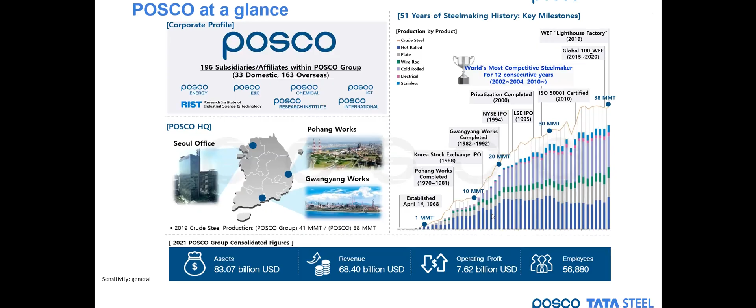On the right, you can see we have been the world's most competitive steelmaker for 12 consecutive years since 2010. Our revenue is somewhere around $68 billion. So just a short glimpse of where we come from. And then to my next slide. This slide was not shared in the Hyperloop conference before. The rest are mainly from the Hyperloop conference presentation. But this is how our interest in Hyperloop started.

There was a paper back in 2009, I think from a university in Austria, that had this concept of a vacuum tube transport, targeted more on passengers. When we found that paper and read it, we thought it was very interesting. So we launched a feasibility study in 2010, which lasted for 2 years. Many of you already know that it was 2012 or 13 that Elon Musk came up with the word Hyperloop, but our interest started before. So we looked at how this could be feasible: a tube in a vacuum, which would reduce the resistance for the trains.

We also looked into several lines where we could actually construct this type of Hyperloop within Korea. The result came to a conclusion that unless the technology had a switching technology along with it, it would not be economically feasible. So what came out from our concept was a low speed, semi-vacuum tube, autonomous, with a freight size according to the pallets, and different kinds of details within the structures. The reason we came to a very low speed was the loading and unloading issues: it would be meaningless to send it 1,000 kilometers and then have it wait an hour or two at the end to load and unload. So this is where we started. After our 2 years of feasibility study, we stacked it and waited until the technology came out that we thought could be more commercialized.

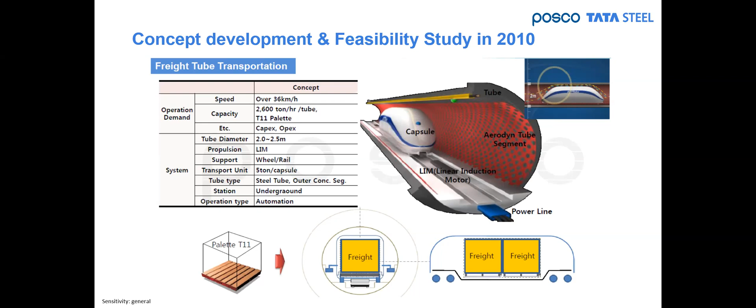Then what happened was that in, I think, 2019, we saw a Hyperloop company in Europe, of course, Hardt. They launched their 30-meter test tube, which showed they can do the switching technology. Then we got interested and took our previous interest back on the table, and then we approached Tata Steel, because it was in the Netherlands, and asked if they would be interested in working together to assist in the Hyperloop development.

So Tata Steel and Posco have agreed, and then we approached Hardt and started to have this joint collaboration to support the Hyperloop industry. Now, I do have a civil engineering background, but when you talk to an engineer, engineers usually talk from the structural side. So we talk about stiffness.

But when you come from the material side, such as steel makers, we come from the material language, which is mostly strength. So although we talk the same language, there is a different meaning or a different approach of where we come from. So what we did was we talked to the Hardt engineers and asked them, what are the actual items or features that you are looking for from the steel side?

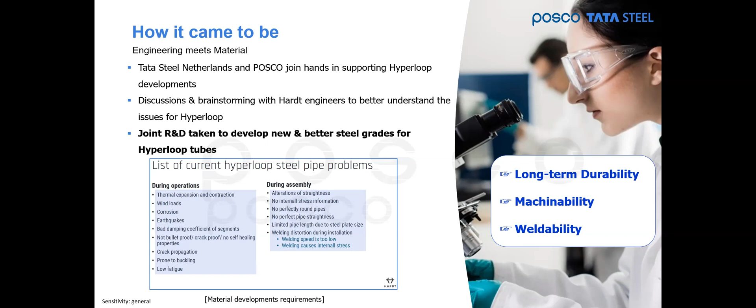From those 3 topics, if we come back to the steel side, damping property was chosen, then yield ratio for easier machinability, and improving CEQs for the weldability. So considering the different chemical compositions, heat treatments, or microstructures, a new steel grade was developed with improved damping performance, lower yield ratio, and similar weldability.

If we go into the details a little bit more, improving safety was an issue from two sides. One was damping. Compared to the regular S355s, the new steel grade has about 1.6 to 2 times better damping ratio. Along with that, we wanted to add low temperature toughness, which is about 4.7 times compared to the regular S355s.

Meaning, if you look into what happens in the Hyperloop tubes, you see a lot of vibrations, and that will lead to fatigue, so better damping will actually help with safety. And Hyperloop, wherever it is around the world, will go to regions with very low temperatures. So that also will improve safety.

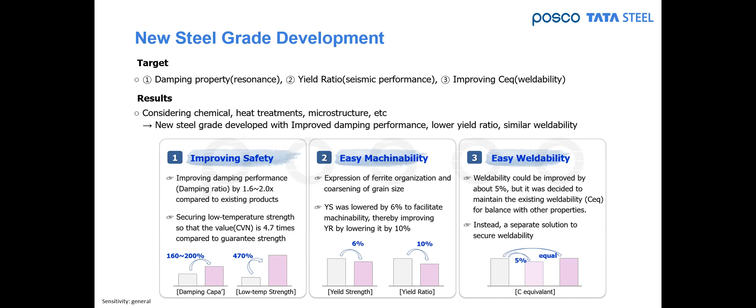And therefore, the first steel grade just for Hyperloop was developed and implemented. Now, when we do these kinds of developments, we do not do it by ourselves. We know that just developing the steel grade and leaving it to the market to use does not really work.

And I think my colleague here wanted me to share the actual sample, if you can see it. That's the actual sample of the steel grade. It was manufactured according to the actual thicknesses. The actual material has been produced and also made into pipes and is now being assembled with the other supports and the tracks currently at a facility in the Netherlands.

So let me give you a glimpse of what this kind of new steel development actually means. It means, investment-wise, several million dollars, because we would have to do it in our small labs, then go into pilot plant productions, and then go into our first real facility to do the actual manufacturing. At a steel mill we cannot produce 1 ton. When we're doing the actual production on our facility, it goes into hundreds of tons.

Our R&D was based on the current processes that are being used. Meaning our weldability: of course, everyone wants to do it twice as fast, but for welding with the current process, it is not possible. Usually what happens when you need that, you put two lines. So with spiral welding or other welding, when you make the pipes, either you do it with two different lines or two different ways of doing the welding from both sides. So that is not the case.

For us, if you do a simple welding with the same process, it will be about 5% faster. But then the issue is, it's not on our steel. It will be on the other material that's being welded to the steel pipe, and you have to follow that criteria. So unless we change everything into a new material, we just left it that it will be the same as it is currently right now.

Is it the hybrid welding technique or is it laser or gas welding? What's the type of welding? No, it's the same sub-arc welding process that is being used in the pipe manufacturing.

Okay, we've got more questions. Let's go through those. Which industries do require similar properties of the steel like Hyperloop does? So where do you see maybe benefits for other industries with the steel you have developed right now? Well, for this steel grade, we have only targeted Hyperloop.

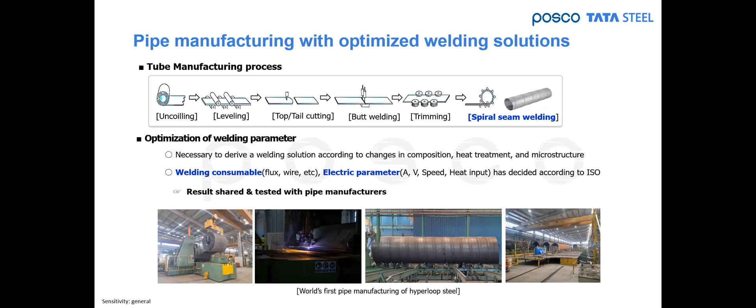On that point, if we talk about damping and the resonance issue, the approach is not only from the material side. It also has to come with the shape. We believe that issue should be addressed later on with the actual shape of the pipe. That's why we're sharing the structural development that is necessary. But if we can give a material that is better, it would improve even further on the structural side. There are different methods to countermeasure it. We'll see what the actual requirements are when we have the high-speed tests.

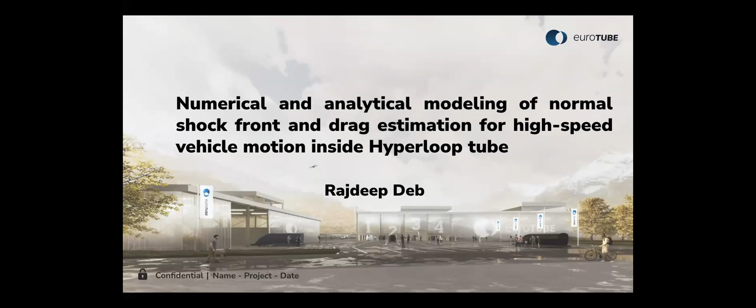So my talk is about numerical and analytical estimation of the shock front developed in front of the vehicle, and to what extent we can use simple numerical and analytical tools to understand the behavior of the shock and also predict something about the drag estimation of the vehicle. So basically, my talk is about this viewpoint.

In Eurotube Foundation, we are working on aerodynamic studies regarding vehicle movement inside such a closed tube system, and we developed some simple tools to understand it. One is a one-dimensional piston problem, where analytical modeling can be used to understand this flow feature behavior, and we also have numerical solutions. Then there is an analytical solution development on choking flow condition for finite blockage ratio. Finally, there is some comparison with a 2D CFD solution.

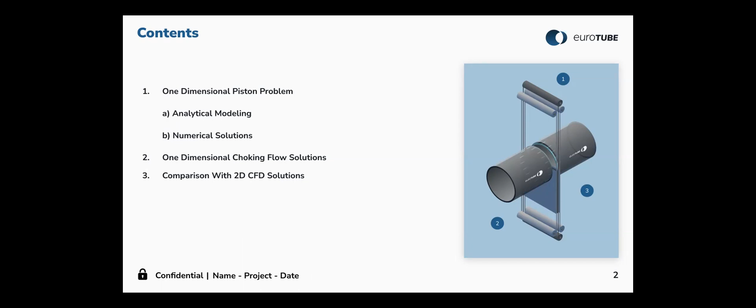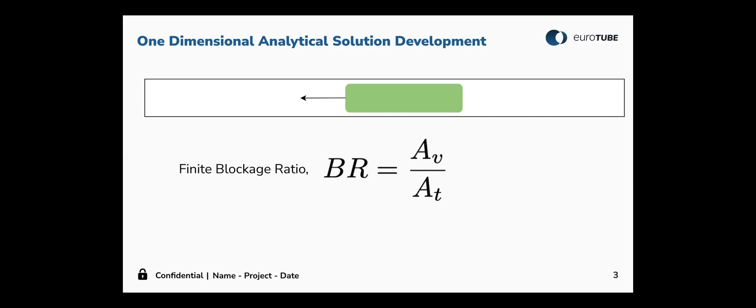Basically, if you look into the problem of a vehicle moving inside a Hyperloop tube, it's a closed tube system, and that's the criticality in this particular problem. There is a finite blockage ratio, and typically a vehicle here I have made a very simple approximation: the vehicle is like a piston shape moving inside the tube. For a simple calculation, if you look into the problem with 100% blockage ratio, the idea is can you get an understanding of what kind of flow features develop from this estimate, and what is the maximum drag with this 100% blockage ratio.

One famous problem in this regard is the piston problem. Whenever a piston moves inside a closed tube system at a very fast speed, some kind of shock front develops, and this shock propagates faster than the piston speed. This shock also carries a high pressure in front of the piston, and as the piston moves away, a low pressure develops behind it. Here you can see the pressure in the tube, with a high pressure developed - this high pressure shock front moves ahead of the piston. Now the question is, what can we understand about the shock strength, meaning the pressure ratio, and what will be the shock speed from this solution?

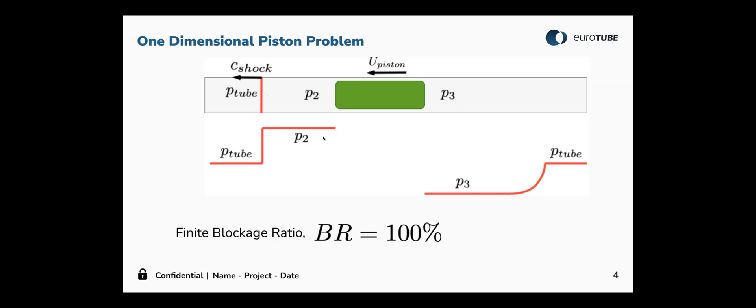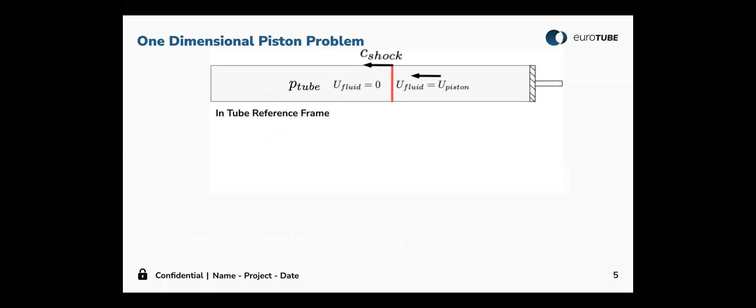For that, we need to look at the problem from the point of view of this normal shock front. Typically in the tube, if you look at the problem from the tube reference frame, the shock is moving ahead of the piston. But this kind of problem can better be understood by looking from a different frame. First of all, from the tube reference frame, this shock front is developing - ahead of it there is the pressure of the tube, and behind it there is the pressure in front of the vehicle.

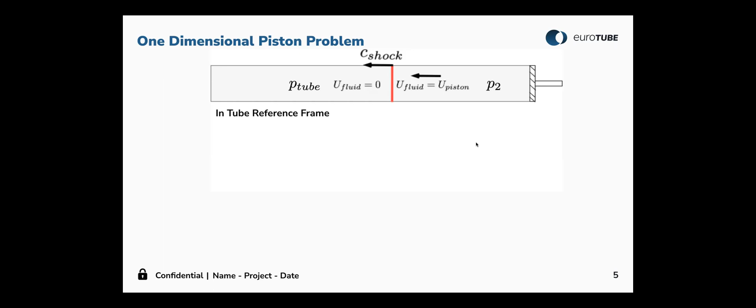Now, if you look at the problem from the point of view of the shock reference frame, you can develop an understanding of shock speed. When we look at the problem from the shock stationary frame, the upstream condition - the fluid or tube we are going into - gets the shock speed, and behind it, the shock speed minus piston speed is developed. There is a famous solution for that, where we can understand the ratio of upstream to downstream fluid speed and pressure ratio based on this pressure ratio. This kind of solution can be established just by solving mass, momentum, and energy conservation equations along this domain. In addition, there is also the relative speed between the upstream and downstream side, which is basically nothing but the piston speed, that can also be established.

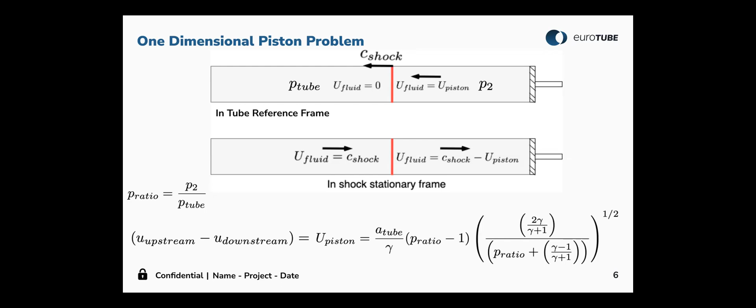Using these two equations, we can finally find out what will be the pressure ratio, because piston speed in our case is the vehicle speed. From that, we can understand what is the pressure ratio, and also the temperature ratio and other quantities can be established. Also in the tail end of the vehicle, because the piston is moving at some speed, there is an expansion wave that develops.

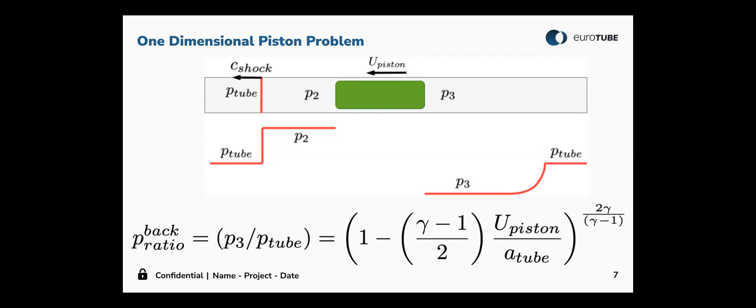This expansion wave saturates into the tube pressure at a finite distance, but it can also be established just by solving the mass, momentum, and energy conservation equations what is the back pressure. So a maximum back pressure and maximum front pressure can be established. From there, we can understand what is the drag calculation, and here is the solution. Basically, we can know the pressure solution, typically pressure ratio from there, and given the tube pressure, you can know the pressure solution.

There is also a pressure jump that develops. With the pressure jump, there is also high temperature developing in the front, and there is also low temperature developing in the tail. I will talk about that later. From that, we can calculate the drag and the drag coefficients also, and this gives us a maximum estimate of pressure induced or shock induced drag on the vehicle, and as well drag coefficients.

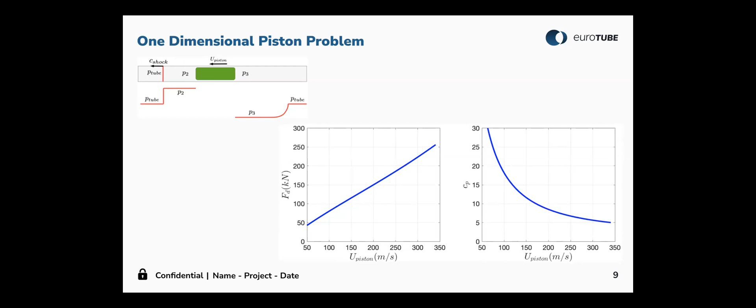Now, this allows us—because this shock is propagating in front of the vehicle, one important feature we didn't consider here is the friction effect. All the friction is attenuating, but if we just try to understand what will be the fate of this shock as it is moving ahead of the vehicle, and if there is any blocking region in front of the vehicle at a little bit far distance, because the shock is moving much faster than the vehicle, then there will be a reflection of the shock, and the shock is coming back into the system.

So basically, the energy that the vehicle has provided into the fluid medium is actually hitting back the vehicle at some point. Therefore, it is also important to understand what will be this reflection effect, and if there is any reflection, what is the corresponding impact on the drag of the vehicle because of this.

The problem can again be looked into from the tube reference frame. In the tube reference frame, now we know that as it interacts with the tube end wall, there will be a reflection shock developing, and we can look into the problem again from the shock stationary frame, and this time it's a reflection shock stationary frame.

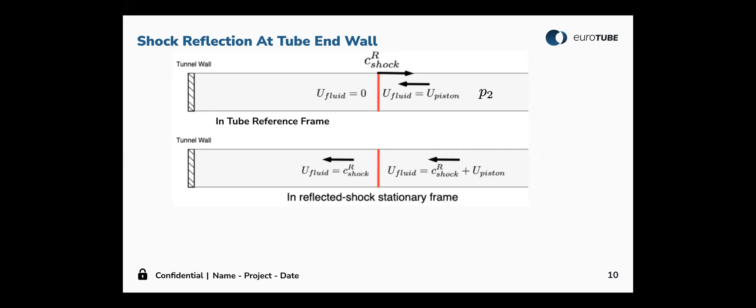We can calculate the corresponding pressure, because now we know the pressure in front of the vehicle, behind this shock, from what we calculated previously from the incident shock wave. Now from the reflection shock wave, we can know what is the corresponding tube pressure developing in this case. This can be calculated again using the same features of upstream to downstream velocity ratio, and finally we can estimate what is the reflection pressure ratio.

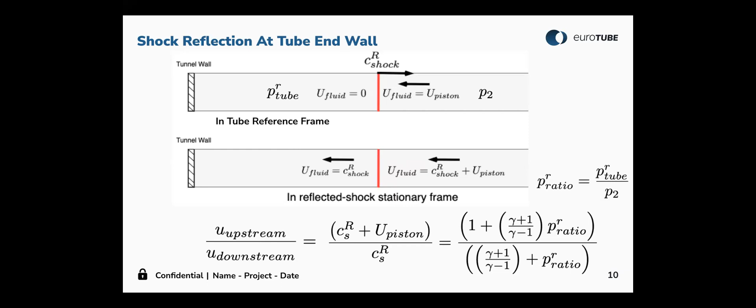This is an important point, because as we look into the problem, for example, if a vehicle is moving ahead from quite a far distance, and this shock attenuation is not enough, then this shock moves ahead of the vehicle, hits the end tunnel, and comes back to hit the vehicle. Here you can see this multiple reflection effect on the vehicle. So the vehicle is moving ahead, the shock moves ahead and then comes back to hit the vehicle.

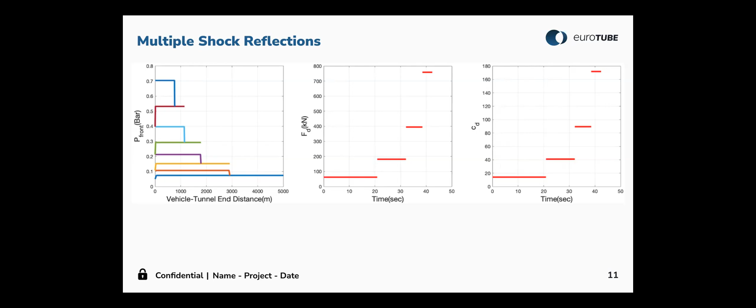At some point, it leads to a jump in the vehicle's drag, and this is therefore a potential thing to be worried about—what is this instantaneous jump in the drag, and what is its corresponding influence on vehicle safety or stability. We can see that there's a continuous drag jump. Of course, this is a much more extreme condition, because we are not taking into account the attenuation of the shock, but it indicates that these kinds of reflection effects are there in the closed tube system. So we need to be careful with shock reflections or shock interactions with the vehicle.

In the previous solutions, we can analytically understand the shock features, but the question is the vehicle will take finite time, because it's not instantaneously getting into this velocity. There is a finite time for the vehicle to reach this speed, which means acceleration. So can acceleration have an effect on the shock speed or shock strength? This kind of feature requires more detailed understanding.

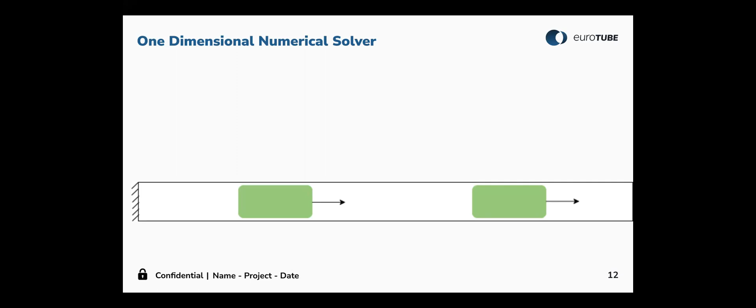Rather than going to very complicated CFD solutions, we can get an estimate from one-dimensional numerical solvers. What this means is that we're averaging the solution over the entire cross-section of the tube, giving us an estimate of the mass, momentum, and energy conservation equations averaged over the cross-section. This kind of problem can be solved numerically.

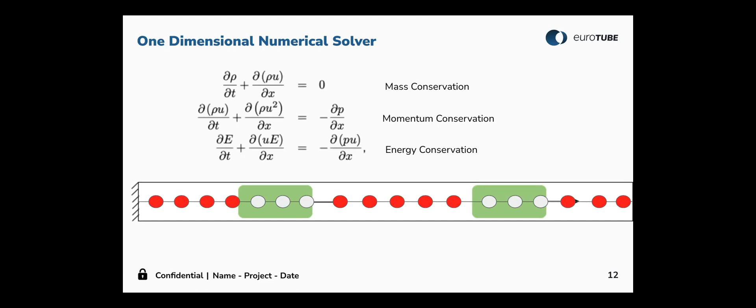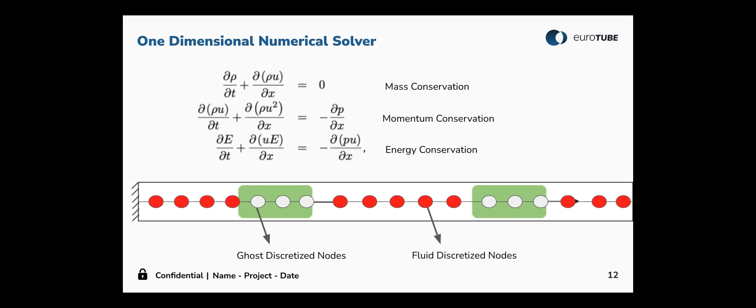I'd like to give a feature of how the numerical methods are developed. The domain can be divided into finite grid nodes, and from there we have certain discretized fluid nodes. Because of the vehicle's presence, there are some nodes which are called ghost nodes. When developing numerical methods for such problems, we need to understand how to track the location of the vehicle, because there are cells corresponding to fluid flow and cells corresponding to the vehicle. This kind of problem can then be converted into a simple numerical solver.

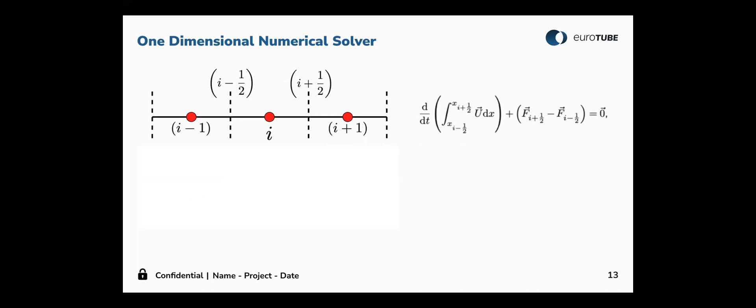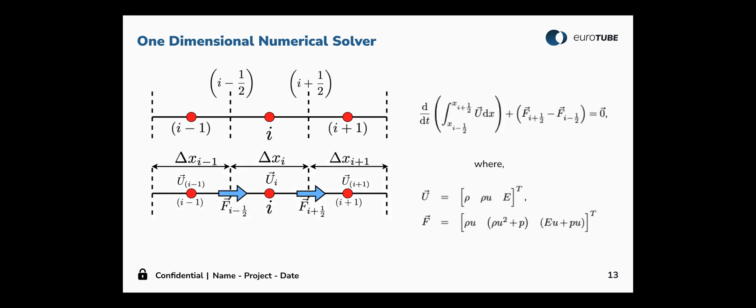There's a famous numerical solver, the finite volume method, which can always be used, and this requires a very critical understanding of how the fluxes can be calculated at the fluid node boundaries. We then need to get a discretized understanding of these fluxes. These solutions can be established in a number of ways.

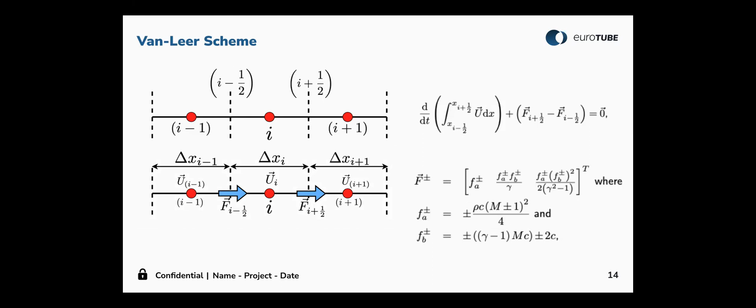This becomes a completely hyperbolic problem, which means the waves are propagating at finite speed, and we need to understand in which direction the waves are propagating. Some famous schemes are available, and one we use here is the Van Leer scheme. Using that, we can understand the direction of wave propagation, and perfectly capture the discontinuities or jumps in the pressure solution along whichever direction they are happening.

The presence of the vehicle makes the problem a bit more complicated, but if we track the vehicle's location correctly in the code, we can understand where to implement the boundary conditions corresponding to the vehicle, and implement them to satisfy certain conditions. In the case of the vehicle wall, we should not have any mass flow rate across the wall. So that condition needs to be implemented in this numerical solution.

This is implemented by considering the wall speed, and introducing a ghost cell inside the vehicle, the first ghost cell, such that the relative speed between the ghost cell and the wall of the vehicle is opposite to the relative speed between the fluid cell, the next fluid cell, and the wall of the vehicle. By that, we can implement this no-mass-flux condition in this particular problem.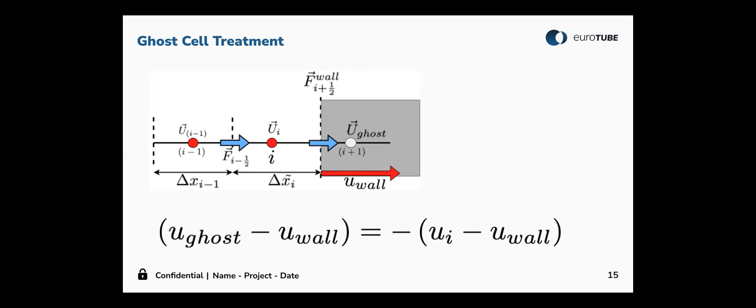In this problem, we are considering an adiabatic condition, meaning the vehicle wall has no heat flow into the system, an ideal condition. We can also go to an isothermal condition where the vehicle has a finite temperature, but in that case we need special boundary conditions for the energy equation.

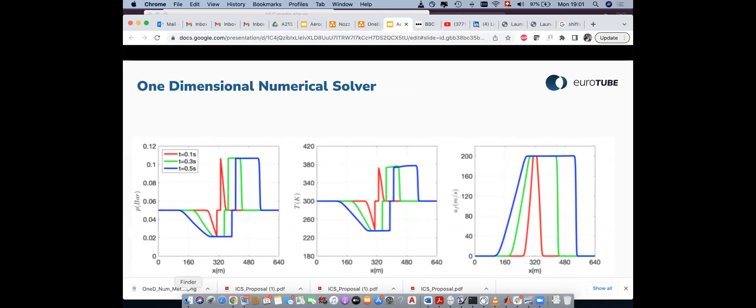With these features, we can solve the problem of the vehicle moving inside the tube. I'd like to quickly show you a video about this, so you understand the power of developing these kinds of numerical solutions.

In this feature, you'll see this step jump representing the vehicle, along with the fluid pressure. As the vehicle moves into the system, a fluid pressure compression wave is generated, and slowly it's converted into a shock wave. As the vehicle moves ahead, a compression wave is generated, and at some point it's converted into a shock wave, which interacts with the wall, and then has a number of interactions because at some point the vehicle stops.

Similarly, if we have a periodic boundary condition, it's not an interacting periodic boundary condition, meaning you can consider a circular system where the track is like a circle. In that case, the shock is moving into the domain, and it is also interacting with the vehicle later.

So this shock is never going to disappear. It is always there in the system because of the closeness of the tube, but it will either interact directly, by causing this kind of sudden step jump, or interact indirectly in the case of a periodic system.

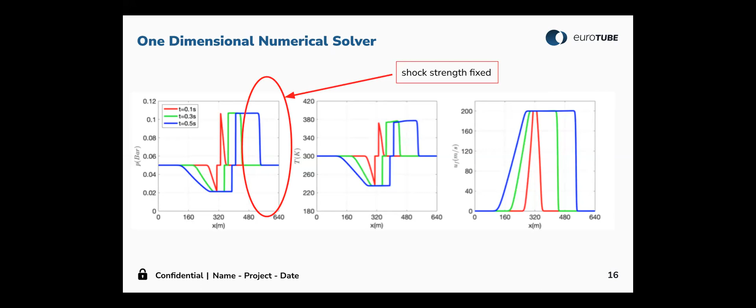Again, we can see that vehicle acceleration has a role in it. You can see initially that in this particular solution the pressure wave is generated, but after some point the pressure wave is converted into a very thin length scale solution over which this pressure jump is happening, which we are considering here the shock wave. This shock wave strength, as we have calculated, doesn't change due to the acceleration effect because of this 100% blockage ratio condition.

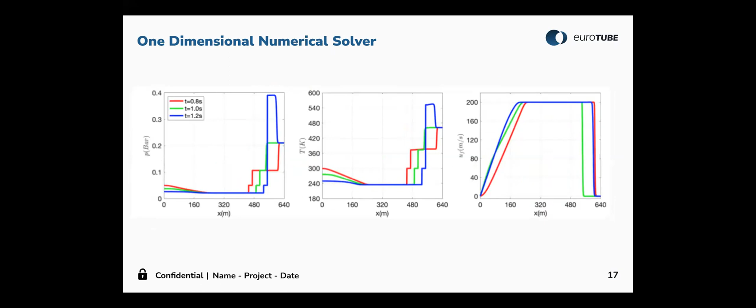And also we see this kind of reflection condition that we saw here. The vehicle shock wave is reflecting back into the system. This effect is also seen numerically, but it has a finite time scale over which this full shock speed is developed based on the acceleration.

Here I use quite large values of acceleration just to have a quick solution developed, but we can always see that there is a time scale over which this front compression wave is completely converted into a shock wave, which is equal to the analytical solution of this particular case of 200 meters per second, about 490 meters per second shock speed, but it will nevertheless take a certain amount of time for this shock to develop.

And similarly, the drag on the vehicle also takes some time scale to fully develop because of the acceleration effect, but the reflection effects are independent. So acceleration can delay the process of this kind of reflection because the vehicle will take some time to convert it into a shock wave, but nevertheless a reflection shock wave can be developed if there is another approaching wall ahead of the vehicle.

And also we can look into the time scale over which this full shock strength is developed with the acceleration effect. So this kind of numerical tool helps us to understand the effect of acceleration in the system. In addition to that, I don't have a solution here, but I would like to show that we can also have a solution, for example, for multiple vehicles in the system. For example, in this particular problem, I'm just showing that multiple vehicles are present, which can be resolved also.

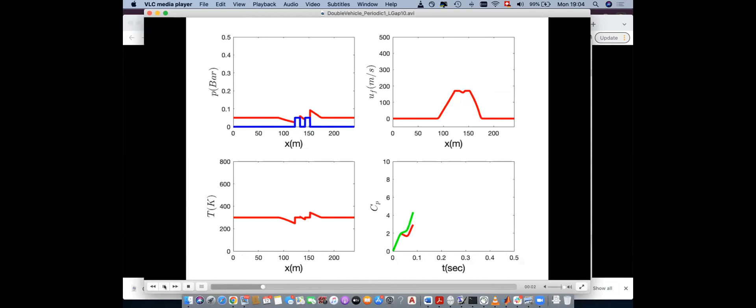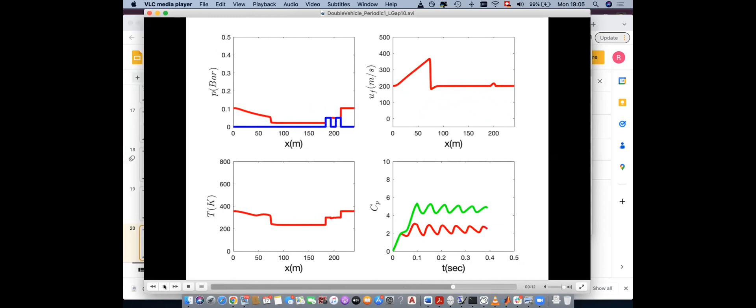And as you see, the drag solution is now not increasing, but there is a jump or a fluctuation on the drag because of interaction between the two vehicles with time. And this effect is persistent and present. We have to do further analysis to take into consideration the friction effect in this problem, but we can always see this kind of fluctuation that has developed because of multiple vehicles present.

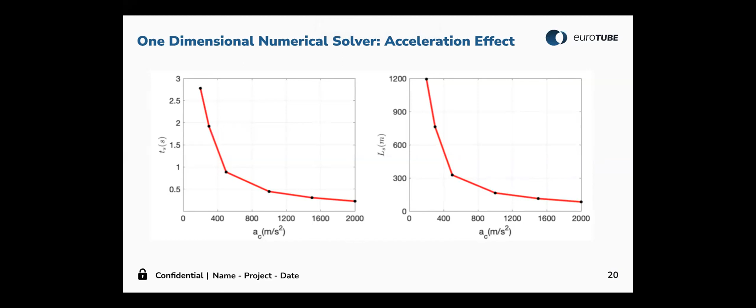Okay, so now we have been able to understand this normal shock developing with the 100% blockage ratio. But what about the finite blockage ratio? How can we predict the value of the shock strength because of the finite blockage ratio? And here is also an interesting observation that the vehicle can be seen as equivalent to a choking nozzle.

So what happens in a choking nozzle, which is a subsonic nozzle: when on the upstream side the flow has subsonic features, as the nozzle area is decreasing, it accelerates, but it can accelerate only to the extent that at the throat of the nozzle a Mach number 1 condition develops. And if we try to push more fluid through this system, a shock wave develops in the back here to change the upstream condition.

So the vehicle also behaves similarly in this case, because the vehicle also suddenly changes the available area around it for the fluid to flow. So therefore, there is also the possibility of a choking condition to develop, and that always develops at any finite blockage ratio at higher speed. The flow will become sonic at some point, and then because of the decreasing vehicle area, it will behave like a Laval nozzle, and supersonic conditions can also develop at the tail end of the vehicle.

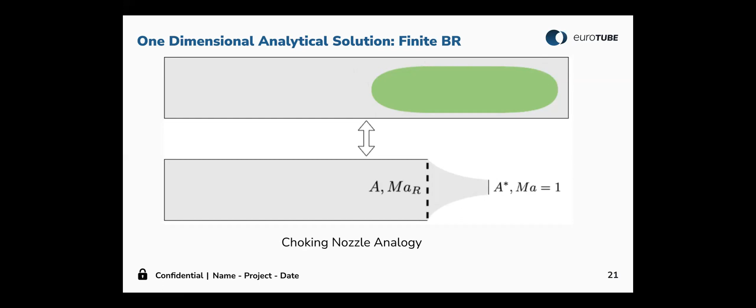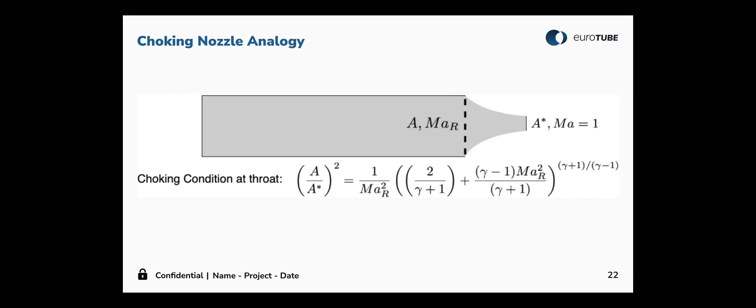But can we predict the upstream shock conditions by using this choking nozzle? And the answer is yes, we can, to an extent. In the choking nozzle case, first of all, we can understand what is the Mach number that corresponds to this choking nozzle condition in the upstream, and from there we can calculate what will be the corresponding blockage ratio.

But now the question is, if we know the blockage ratio and the upstream condition, we can always develop a solution for the shock to propagate in the upstream. That means this time again, we know the downstream Mach number, we know the upstream condition completely, and we know that there is a shock propagating.

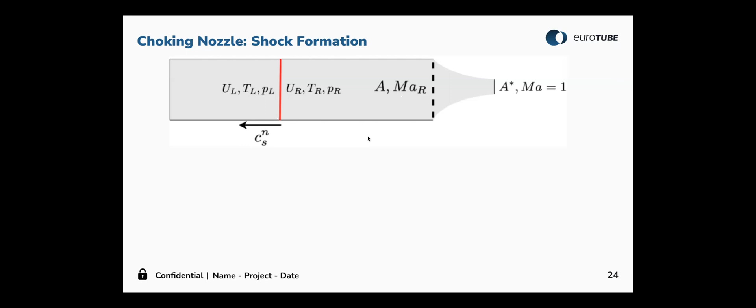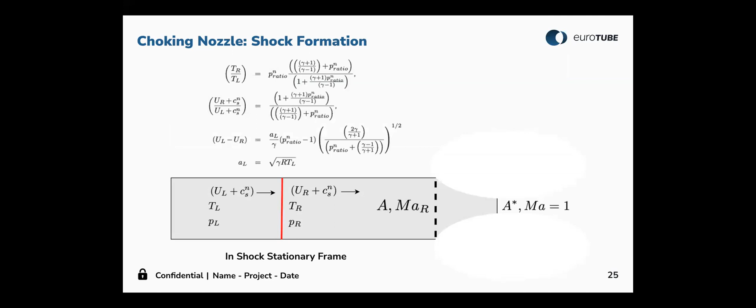So across the shock, what will be the behavior? That can be understood by, again, looking into the problem from the shock stationary frame, moving with the shock, and a solution can be developed from the mass, momentum, and energy conservation equations. We develop this kind of solution, and we see what the pressure ratios are, what the shock speed is, and what the temperature is ahead of the vehicle.

And the question is, these 1D calculations, can we trust them? Can we have an experimental tool to see that really these kinds of features are developed? Well, currently we do not have a Hyperloop running, so we cannot do the experimental analysis, but we can always do some more detailed CFD calculation. And that's what we did here. We try to see if by 2D CFD solution we also get these kinds of shock features.

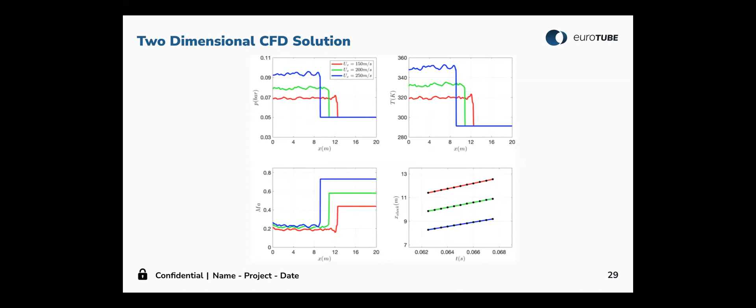but later this normal shock completely develops. With increasing vehicle speed, the relative speed between the shock and vehicle is lower. It is to be understood that the absolute speed of the shock is still higher, because we have to add the vehicle speed to the shock in this particular kind of simulation. And we can establish how this pressure jump is propagating forward. We can calculate the shock front, that is, the speed at which this pressure jump is propagating.

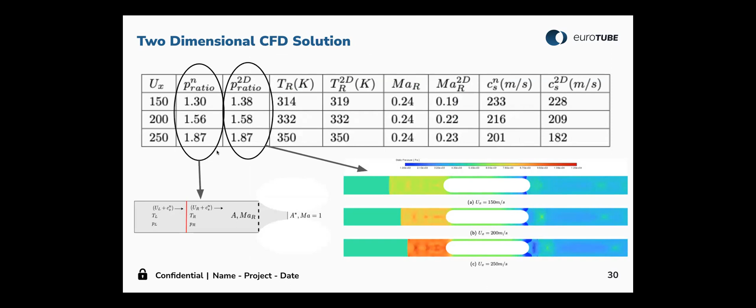Interestingly, 1D analytical and 2D numerics match decently. At higher speed, we get a little bit of difference in the shock speed calculation, but for this pressure jump, which is very important, we get a good match. And also from the 2D, you can see this lower pressure developing at the tail. So there is also an essential question of how to control this low pressure development.

That means this oblique shock development, in the case of viscosity-induced problems, there is also the possibility of shock boundary layer interactions, which can further reduce the pressure and therefore increase the drag. These calculations we have done, but I'm not showing them here currently. But there should be some control features developed at the tail end of the vehicle to reduce this kind of drag that our analysis shows.

Finally, again, I'm not going into the details. Similar to 1D analytics, 1D numerics can be done also for the finite blockage ratio case. And from there also, we can understand what will be the shock speed developing. It will definitely reduce the computational time scale for the shock solution, and we can also capture more complicated phenomena like the acceleration effect.

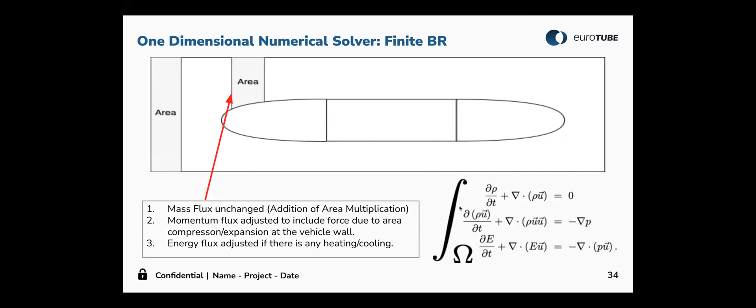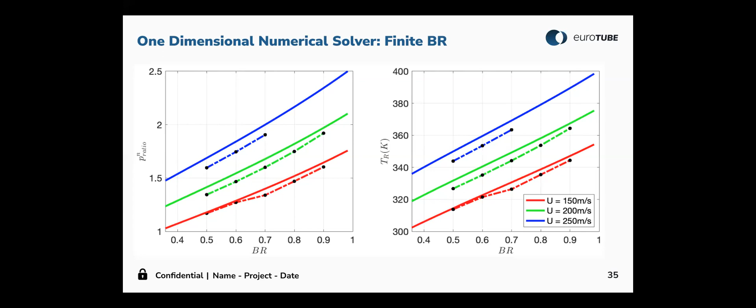But here, how to solve this thing? We have to similarly do this area-averaged solution, and this time we have to take care of the area averaging of the mass, momentum, and energy conservation equations. From there, we have established some solution for the pressure and temperature. It requires a little bit more understanding to see how well it matches with 2D numerics and 1D analytics. Currently, we are seeing that it is a little bit under-predicting compared to the analytical solution, but it's interesting to look into further details here.

So finally, as a conclusion, I would like to say that the piston analogy is very useful to understand the maximum values of pressure drag, shock strength, etc. And it also provides an understanding that shock reflection is possible. Vehicle acceleration delays the full shock speed development, but shock strength still remains the same. And the shock speed for finite blockage ratios can be predicted using this kind of choking nozzle analogy. And area-averaged equations can also be used to understand these important flow features, both in the front and the tail end of the vehicle.

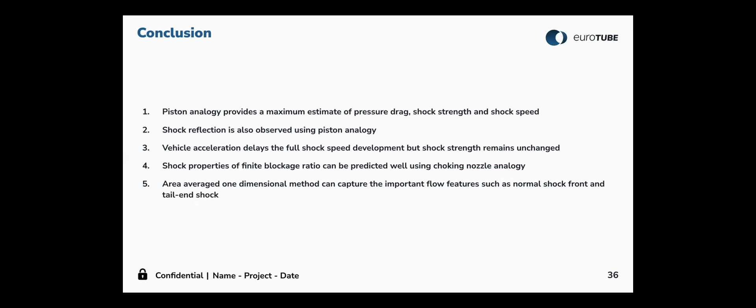Further research objectives based on this kind of research: so far, the research that we did shows an interesting feature, which is the shock development at high speed. Therefore, there is definitely a requirement to control or reduce the shock strength by a defined attenuation mechanism. Another important point is that the reflection shock causes a sudden jump in the drag, so there should be measures to control this kind of drag jump caused by instantaneous shock-vehicle interactions.

In other Hyperloop studies, for example, the thermal effect also requires a look, because high temperature develops in the front and low temperature develops in the back. So can we take other measures to understand how to deal with this kind of high temperature effect on the vehicle? With this, I'd like to conclude my talk.

I'd be happy to take up any questions. Well, thank you very, very much for your presentation. There was a lot in there, and I was barely caught up to most of it. Well, thank you very much. I've heard some of the Laval model stuff already talked about for Hyperloop, so it's great to see you catch up on that as well. There are a few questions on Slido that I would like to ask you.

So the first one is, do these analytical solutions also present a model for the 3D world? Is there a possibility to 3D model it, and how do the analytical solutions relate to the 3D flow? So analytical solutions are limited here, and they cannot perfectly capture the 3D effect, because in 3D there is also a lift effect. But it can give an understanding of the shock speed and shock strength problem.

And there was one question about the shock strength with regard to blockage ratio. Is there a dependency between shock strength and blockage ratio? I think you had the shock strength on one of your slides. So does that depend on the blockage ratio, and what would it be? Yeah, definitely, there is an effect. Let me show you. Okay, where is one? Yeah.

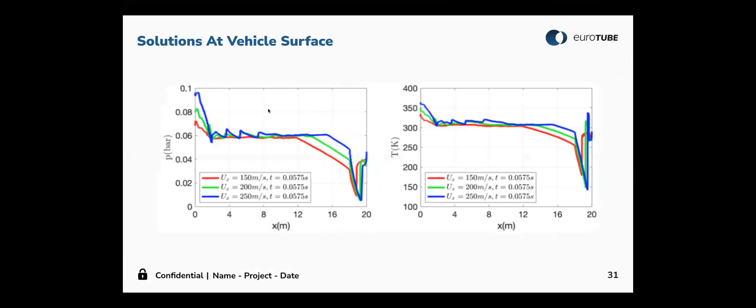So from the analytical solution, the blockage ratio can give us an estimate of the shock strength, that means the pressure ratio across the shock. Interestingly, as I go towards blockage ratio one, the 100% blockage ratio, it matches the 100% blockage ratio values also.

Typically, for example, with blockage ratio 0.6 and 200 meters per second speed, I can see about a 1.6 order jump in the pressure. That means if tube pressure is 5,000 Pascal, it can go up to 7,000 to 8,000 Pascal across the shock. So this analytical solution can definitely capture the pressure jump across the shock from the blockage ratio. Well, thank you very much.

The next one is about the piston having a flat head, compared to a vehicle that probably has a curved shape in front. How does that relate to those simulations?

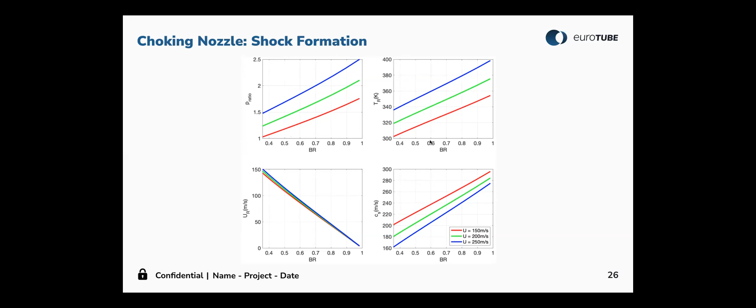And maybe you can touch a little bit on the front and the back side, because I think there have been some interesting parts about the back or front shape of the vehicle with regard to aerodynamics, what you have to do. Yeah, exactly. So this is another interesting problem. So currently, in this problem, I wanted to see whether the shock features can be captured or not.

That's why initially, when you do this kind of 2D simulations, we'll see a curved shock develop in the front of it. It will take some time for this shock to propagate and become a fully normal shock. And I was looking into this normal shock speed, so it will take some time to develop into this fully normal shock, and then it moves ahead.

So definitely this curved shape has an impact initially, in the initial transient mode, on how the shock develops. But the later features, what we have seen, match analytically; it's kind of independent of this curvature behavior. After some time, when this fully normal shock is developed, its features are more or less independent of this.

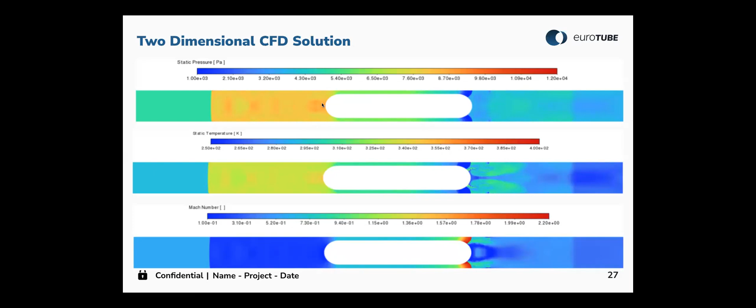But we have done another interesting thing that I would like to show. Yeah, exactly. 1D numerical solver with finite blockage ratio. So here, as we have looked into it, we have considered the area average solution around the vehicle. So here the vehicle shape effect is considered to some extent, although I didn't put the simulation result here.

But we can get how long this curvature will take to develop into a straight vehicle, and what effect this has on the drag, we can understand from it. Currently I don't have a solution, but from this kind of numerical solution, we can also have an estimate for the vehicle shape effect. It is not as detailed as a 3D calculation, but it can give you the drag change because of the shape.

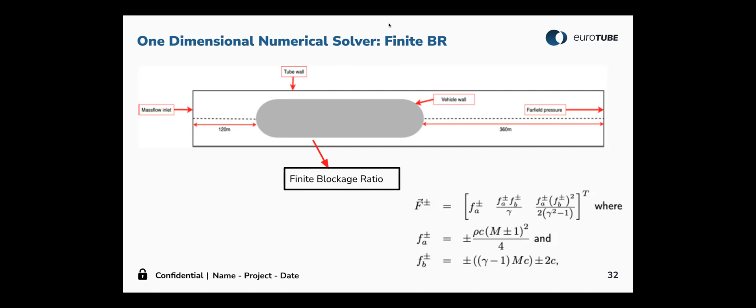Great, thank you. Somebody has asked, they've seen a paper in the background of your computer, whether that's your paper and whether it's published so they can read through it and catch up on all that information. Yeah, exactly. So this was particularly the shock development and normal shock propagation speed. We have written a paper and submitted it to the journal Aerospace Science and Technology. It's under review.